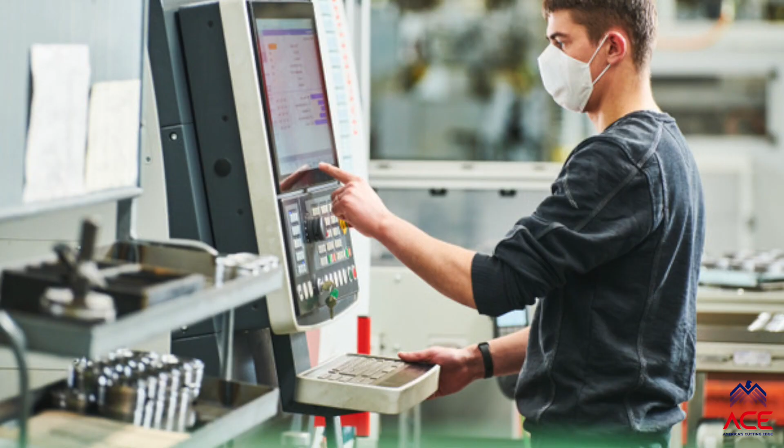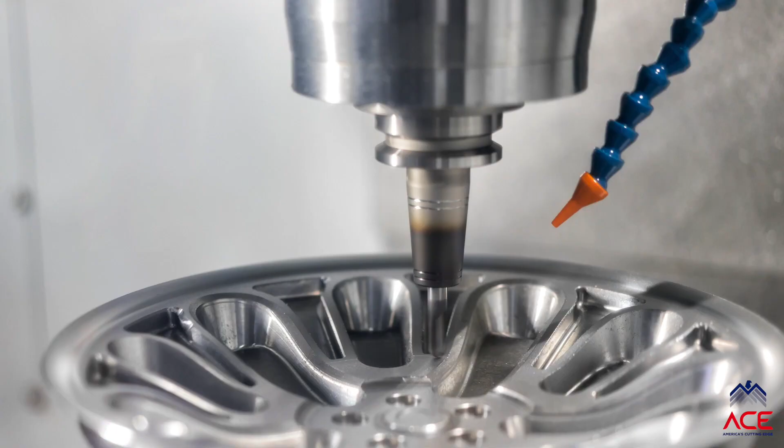The ACE CNC Machining Training Program is designed to teach essential machining skills and address the nation's growing manufacturing workforce gap. The in-person curriculum guides users through the steps necessary to set up and machine components.

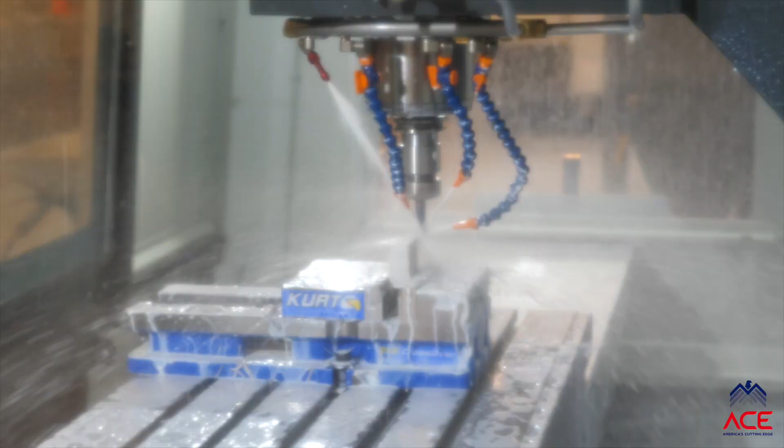This program is unique because it introduces participants to the importance of considering machining dynamics when selecting CAM, or computer-aided manufacturing parameters. This leverages new technology advancements being developed now at Oak Ridge National Laboratory to increase productivity and efficiency

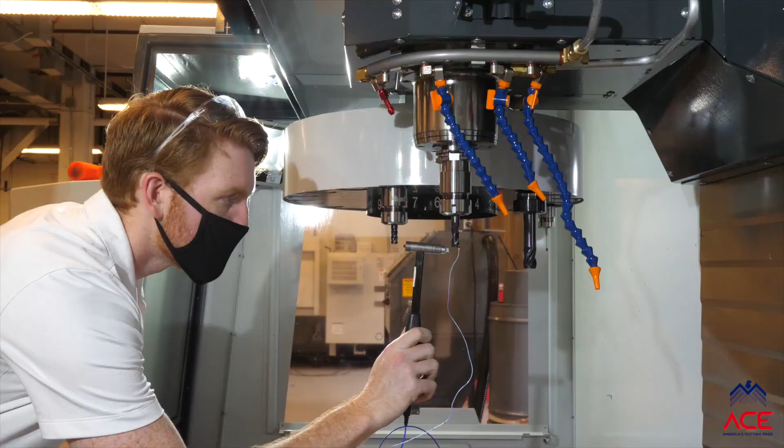of current machine tools. Thanks to a partnership with Oak Ridge National Laboratory, MSC Industrial Supply has deployed a new service called MillMax to provide tap testing in manufacturing facilities. This product enables CNC programmers to select stable machining parameters for increased productivity without expensive trial and error.

Today we're going to do a chatter demonstration that will be composed of 3 parts. The first thing we'll do is measure the tool tip dynamics using tap testing. My colleague here, Greg Corson, will be doing the tap testing for us. Once we've identified the tool tip dynamics, we'll predict a stability map. Given that stability map, we'll select machining conditions.

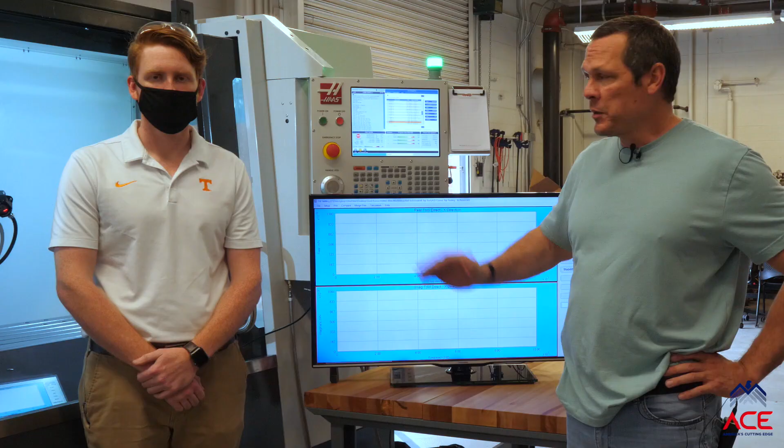And we'll do 2 machining conditions. The first will be for chatter, and the second will be for stable machining conditions, and we'll hear and see the difference. The third part, we'll remove the workpiece from the machine tool and we'll look at it under a microscope so that you can directly see the difference in surface finish and why we want to avoid chatter conditions.

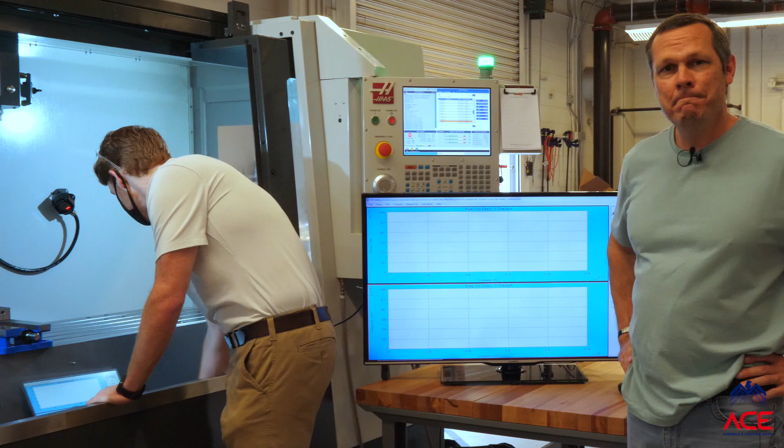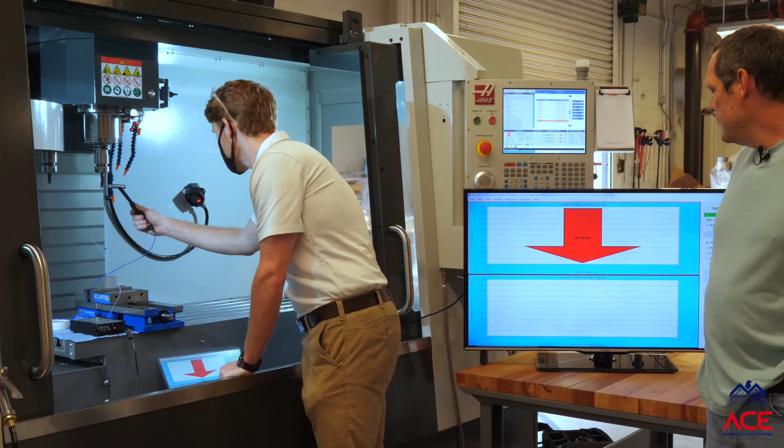Okay, so let's begin with the tap test. So Greg, let's start in the X direction. What you're going to see from Greg is the tap. Okay, so now we see in the top figure the force that came from the hammer. So it looks like an impulse.

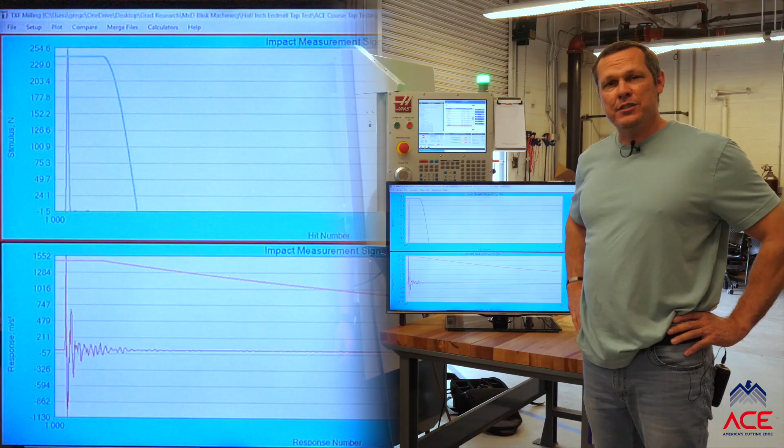We tapped the tool. What we see in the bottom figure in the red is the tool's vibration response. So when we tap it, it vibrates. We'll do a few of those averages and then we'll take a look at the frequency response function. Greg? One more.

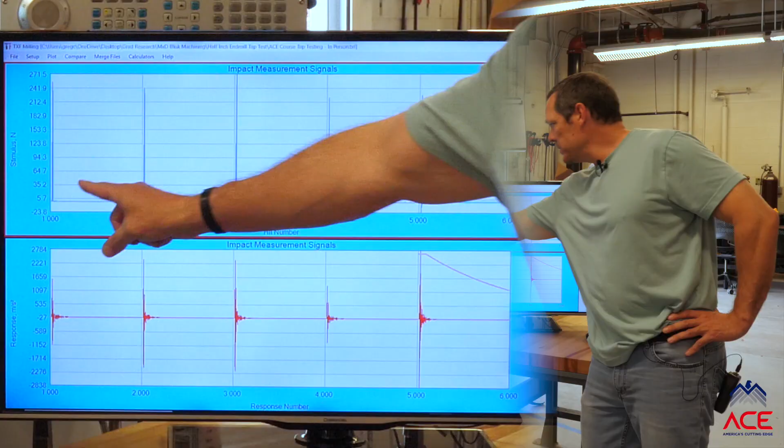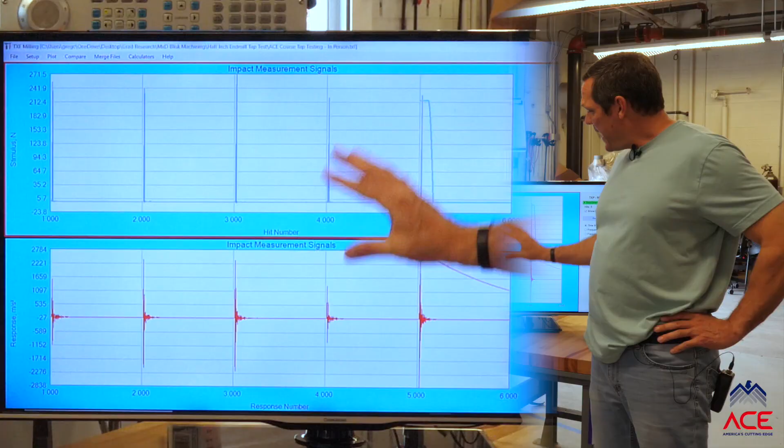Okay, so what we can see on the screen now is 5 individual taps of the tool. So you see the 1, 2, 3, 4, 5 peaks, and then 5 responses due to those hammer taps. Now that we have that information, we can use our software to calculate the frequency response function.

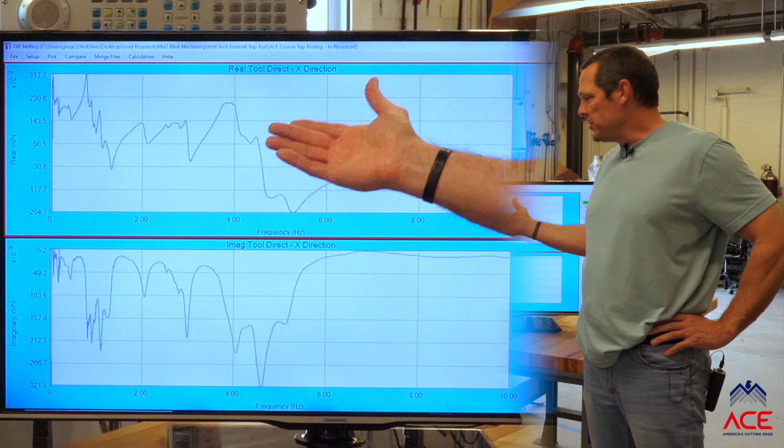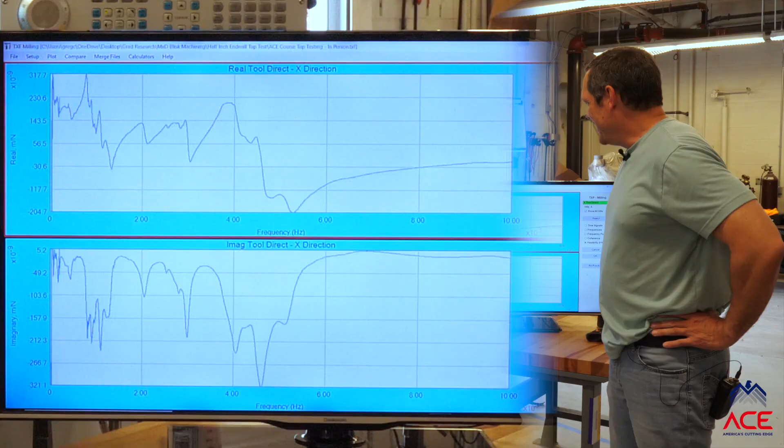Okay, so what do we see now? Well, we see the 2 parts of the frequency response function. The top is what we call the real part, and the bottom is what we call the imaginary part. That doesn't mean one exists and one doesn't, it's just a mathematical term. And so it is this information which then enables us to calculate our stability map and select machining conditions that are either stable or unstable.

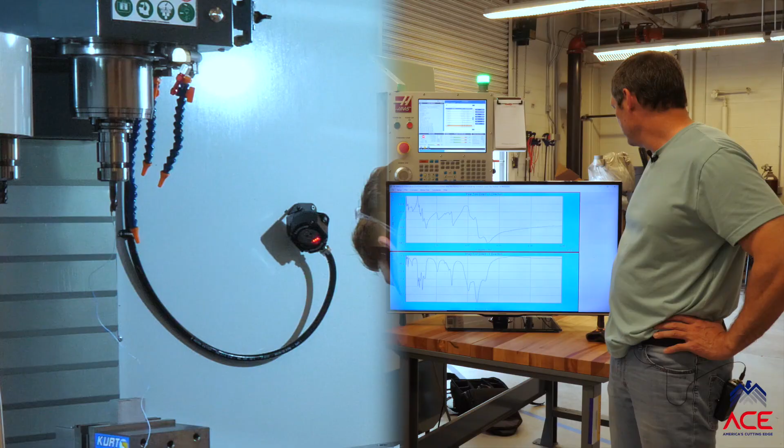But before we're all done, we now need to measure in the other direction. So in this case, Greg was measuring in the X direction on the machine. Now we want to measure in the Y direction. Okay, so the computer is awaiting the hammer tap.

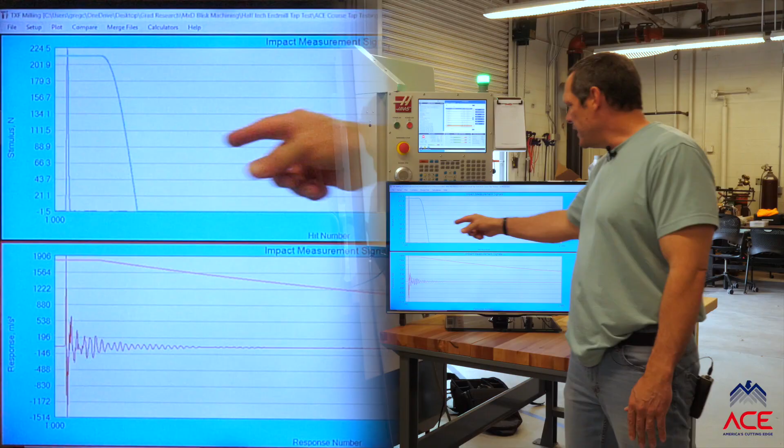And we see the result looks similar, right? We see the hammer input, so that's the force that we tapped the tool with the hammer, and then we see the vibration response of the tool because of that hammer tap. Okay?

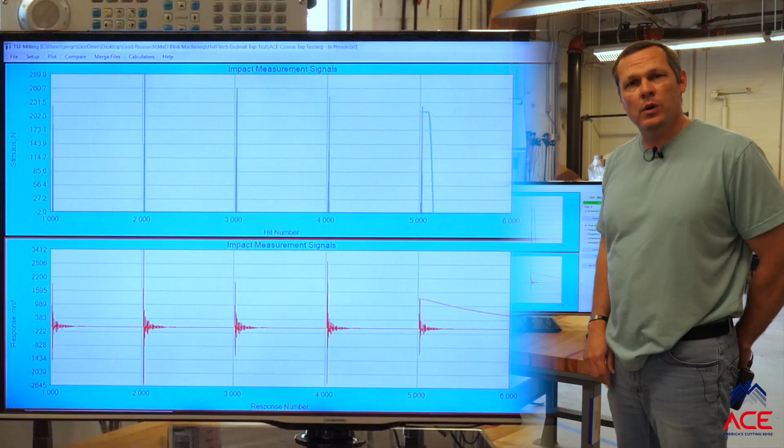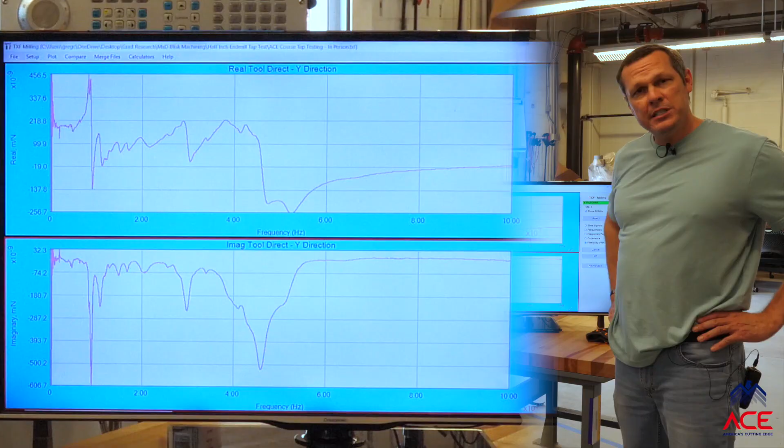Thanks, Greg. So now, like the X direction, in the Y direction, we have 5 hammer taps, 1, 2, 3, 4, 5, and the corresponding vibration response of the tool for each one of those hammer taps. And now we can look at the frequency response function from that data. So there we go. So now we have the real and imaginary part of that frequency response function, which describes the vibration in response to a force.

And with the X and Y direction data, we can now generate a stability map. And we're going to see 2 versions of those stability maps here. On the right, we see a version which is axial depth of cut in the vertical axis and spindle speed in the horizontal axis.

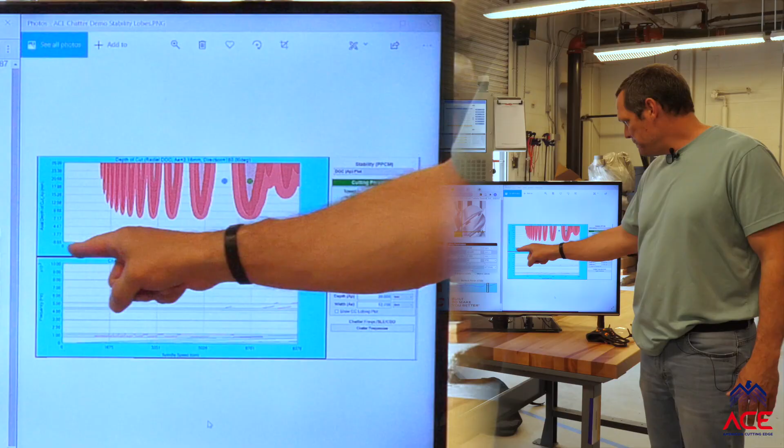And what we see is a white zone where combinations of axial depth and spindle speed will give us stable cutting, which is what we want, and then a red zone where combinations of axial depth and spindle speed will give us chatter, which is what we don't want.

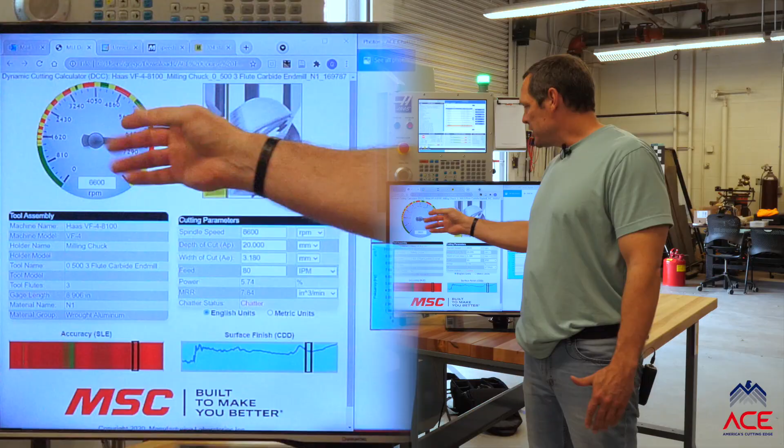Another way to look at that data is the MSC MillMax dashboard. So in this case, instead of showing the map that we just looked at, we have a speedometer. And that speedometer is giving us spindle speed in RPM, and then we have it marked off as yellow, red, and green zones. So the red is where we'd anticipate chatter, the green is where we'd expect stable cutting conditions, and yellow marks the boundary between those two.

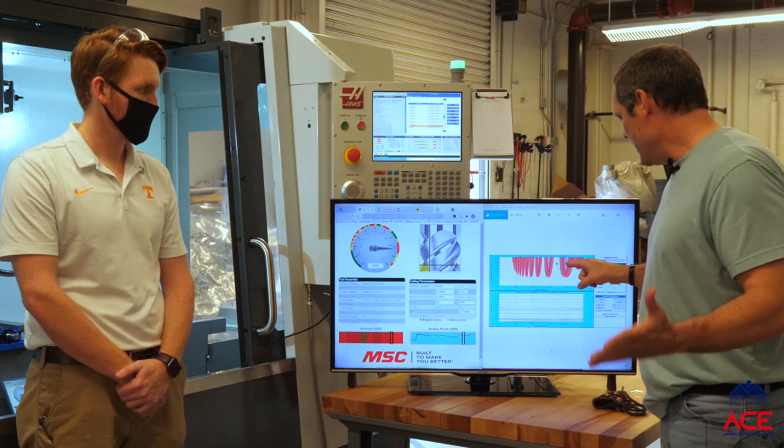Okay, so we're going to complete cutting tests now for 2 cases. The first case is we're going to select a spindle speed and axial depth which gives us chatter. And so we can see in this case for 6,600 RPM, we're in the red zone at a 20 millimeter axial depth, and we're predicting chatter.

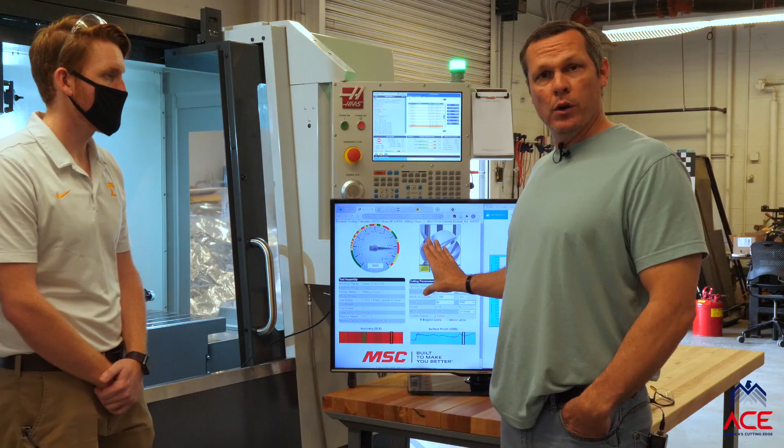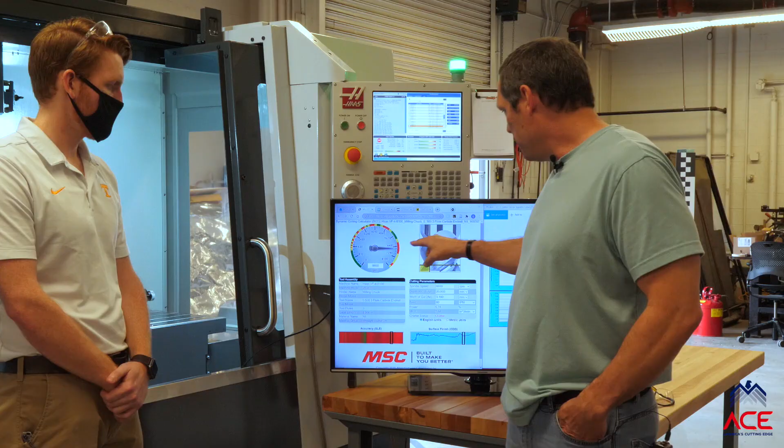The same is true for the MSC MillMax dashboard. We have 6,600 RPM programmed, 20 millimeter axial depth, and then the 3 millimeter radial depth, and we're predicting chatter. We're in the red zone, and so we would have an unstable cut in that case.

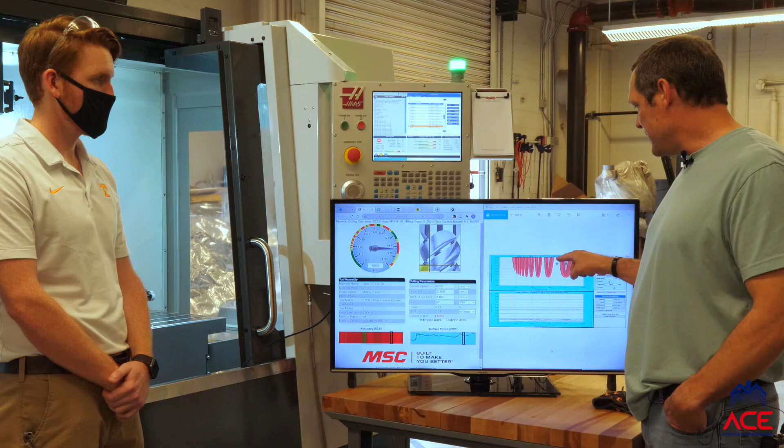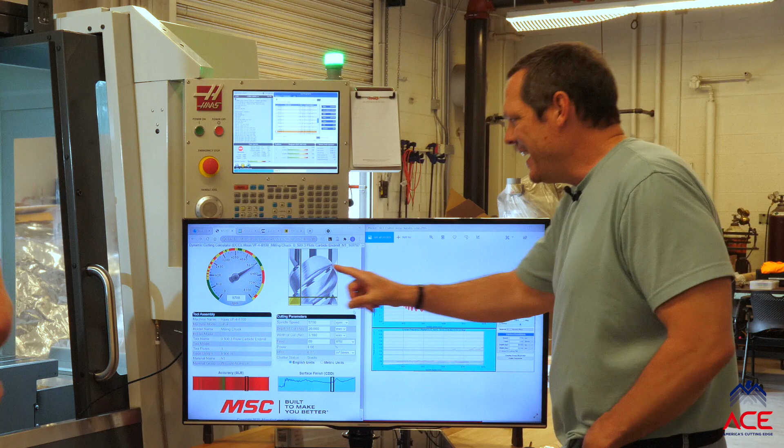Now, if instead we change our spindle speed to a stable condition, we can see that for the stability map, that would be the blue circle that we see, and then we can change the spindle speed here to the stable cut, which is 5,700 RPM in our case. And now we've moved into the green zone, and we would predict stable cutting conditions by the MSC dashboard. Okay, so let's now proceed to our cuts, and we'll be able to see and hear the difference.

So now we're ready to begin our cutting tests. And as I mentioned, we'll do 1 cut for unstable or chatter and 1 cut for stable machining using the parameters that we already identified using our stability map and the MillMax dashboard.

So what Greg's going to do is first complete a tool change to move the tool that we already measured into the spindle. He's going to adjust the coolant lines so that we have the coolant pointed at the tool, and then complete our first cutting test, which is the chatter demonstration. Greg?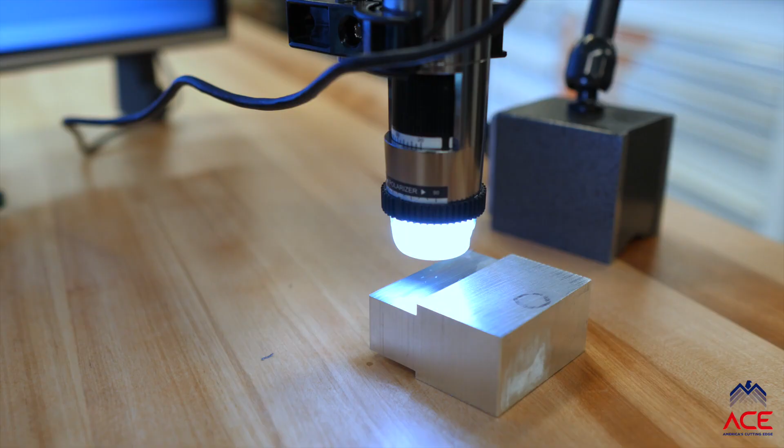Okay, so now we've taken the part out of the machine. We have one surface which we made under chatter or unstable conditions, and the other surface that we produced with stable machining parameters. Let's look at chatter first. So we have a digital microscope set up here. The chatter surface is under the digital microscope, and we can see it here.

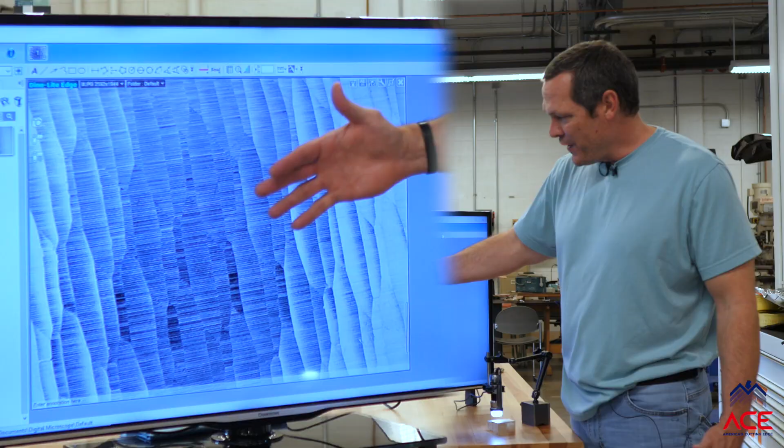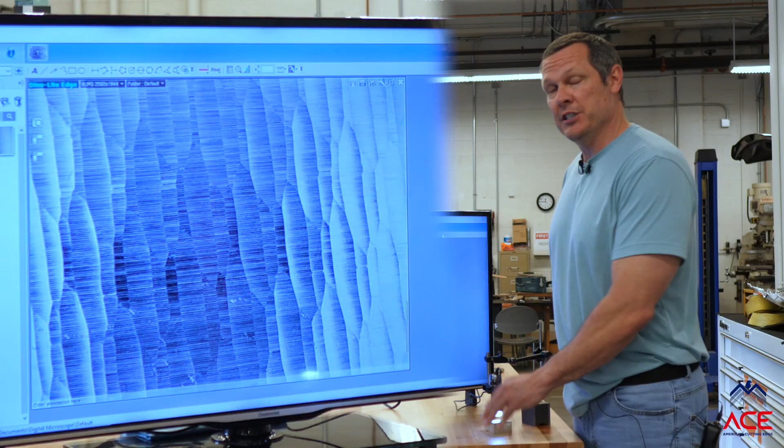What we observe is a very irregular surface finish. The height of these variations that we see is large. So we can turn this around a little bit and you can see the variation in that surface finish for the unstable or chatter conditions. Now let's flip it over and look at the stable condition.

So now for stable cutting conditions, we see a very regular surface finish with small deviations in height and a better surface that we could then use on production parts.

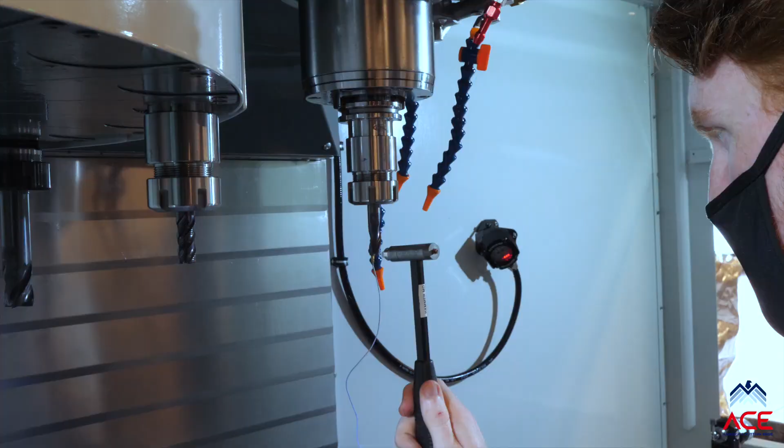So let's recap what we saw. We performed a tap test in order to measure the tool's vibration response. We used that information to develop a stability map, and then we also saw the MSC MillMax dashboard that showed the same information. We used those plots in order to select stable and unstable or chatter machining conditions.

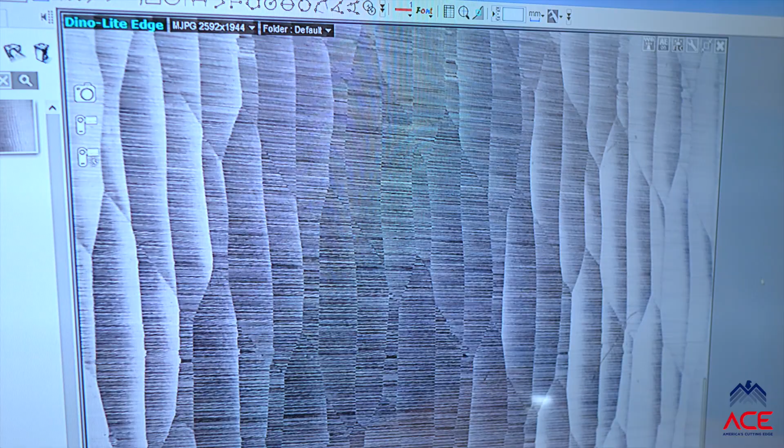We then completed machining tests to show stable and unstable or chatter. For those work pieces made under the chatter and the stable conditions, we then looked at those surfaces. And we saw the chatter had a rough and irregular surface, and the stable machining conditions gave us a smooth surface with a regular pattern.